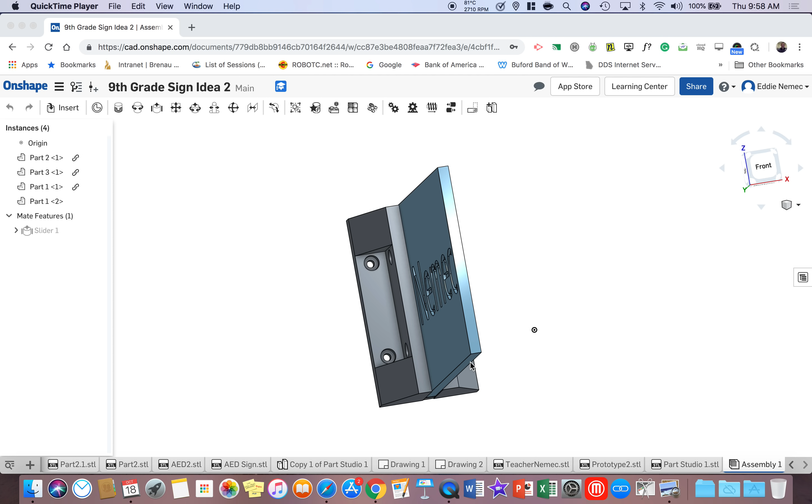Now after you've done your sign, you can see mine says Nemec, you're going to learn how to make this base plate right here on my screen. You'll notice at the bottom I have tons of different drawings. You're going to learn that you can make multiple drawings within one product or one OnShape studio.

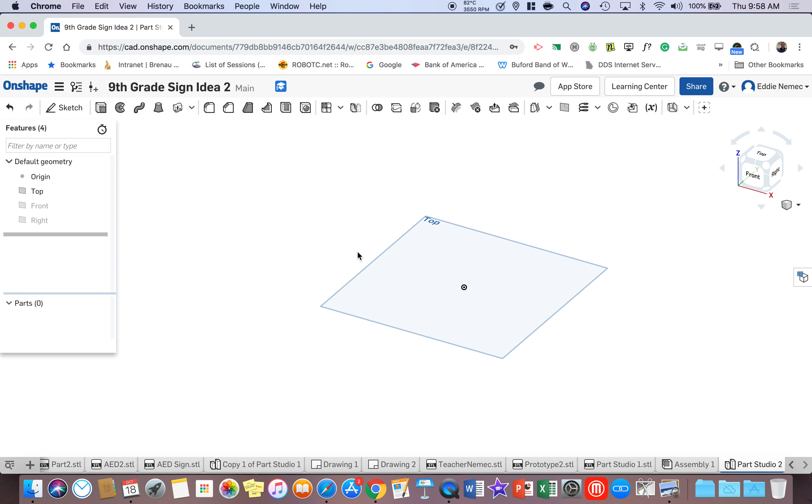So after you finish the sign with your name on it and you have the two holes in the right spot, come down to the bottom left where you see the plus sign, and say insert new element and left click. Then come up to where it says create part studio and left click.

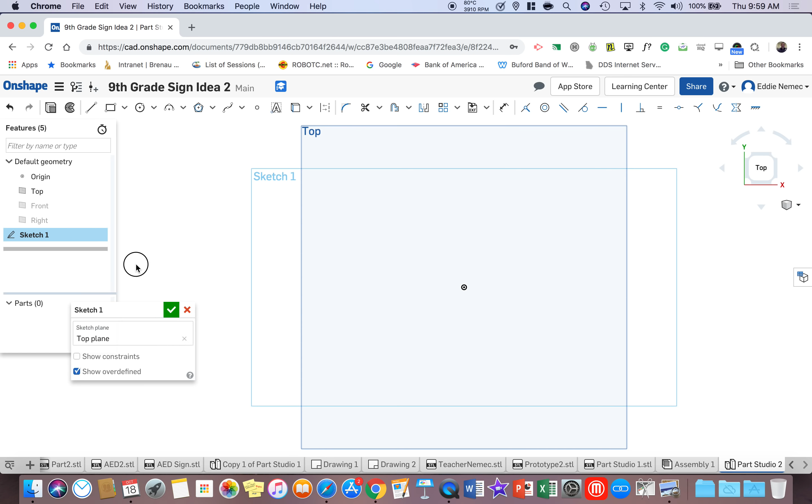Now what you're going to see is a fresh start. Make sure your measurements are still in the 3 bars workspace units in millimeters. Good, they are. I'm going to left click on the check. Now I'll come over to the front, left click on the eye on the front, and hide the right plane. Now all you see is the top plane. I'm going to go to the top of the cube and left click.

Now I'm going to go to sketch, left click on it, and left click on the plane. If this menu is ever in your way, bring your mouse over to the menu and hold down the left button when you see the hand, and you can slide this anywhere out of the way if you need to.

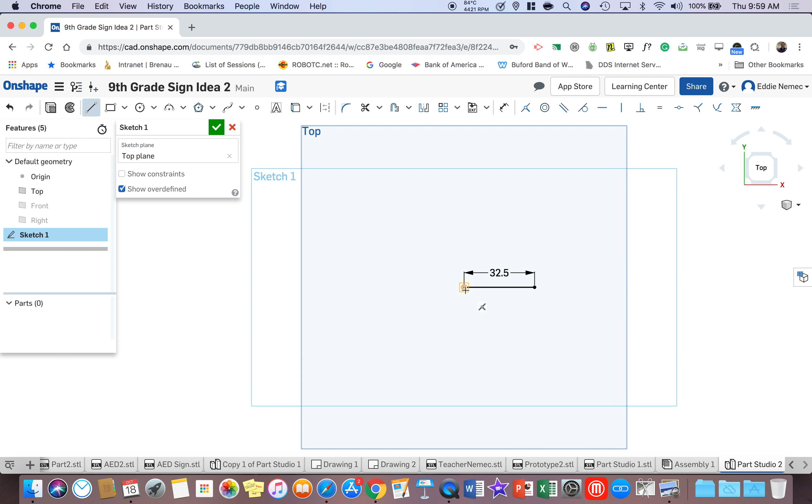Alright, my first step is to go to the line tool and left click on it. I'm going to come right here on the origin and wait till I see the symbol, then left click and start drawing my line out to the right. Don't go up and don't go down, it needs to be straight, just left click. You're going to type in 32.5 and hit enter.

Now I'm going to teach you a really cool trick. I'll right click, escape this line, come back to the line tool, and this time left click on the dot, go straight down, and then left click. I'm not going to measure it, I'm just going to right click, escape line.

Now if you go to this tool, which is called the mirror tool, left click on it. Left click on this line, it'll turn yellow, and then if I click on this line, it's going to reflect it exactly across that line. This is very handy when you want to draw and skip a whole bunch of steps.

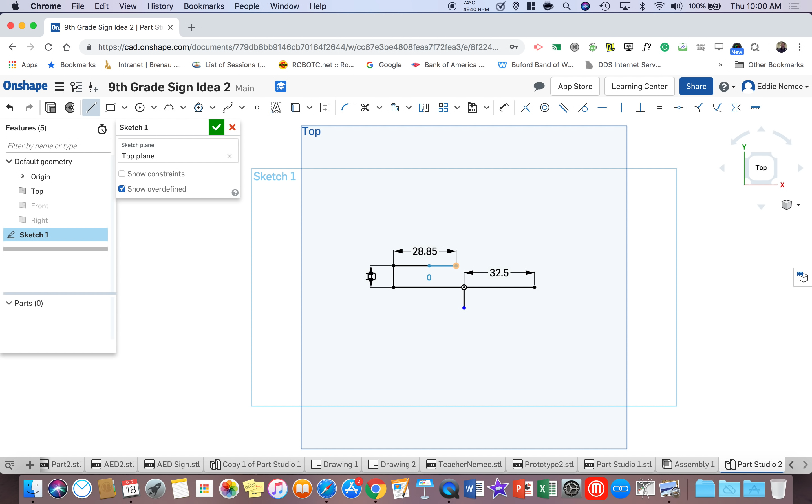So I'm going to go back and uncheck the mirror tool, and leave this line because we're going to use it again. I'll come back to my line, left click on this endpoint and go straight up and click, then type in 10 and hit enter.

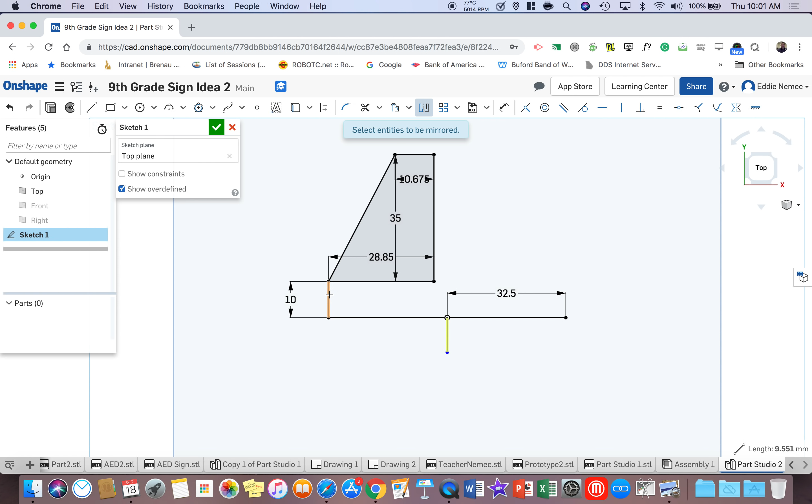I'm then going to come over to the right and left click, and type in 28.85 and hit enter. I'm then going to go straight up, make sure it's a right angle, and left click, and type in 35 and hit enter.

And then I'm going to go across to the left and left click and type in 10.675 and hit enter. Then I'm just going to bring my mouse down to this dot and left click and connect it. Now I'll right click, escape line.

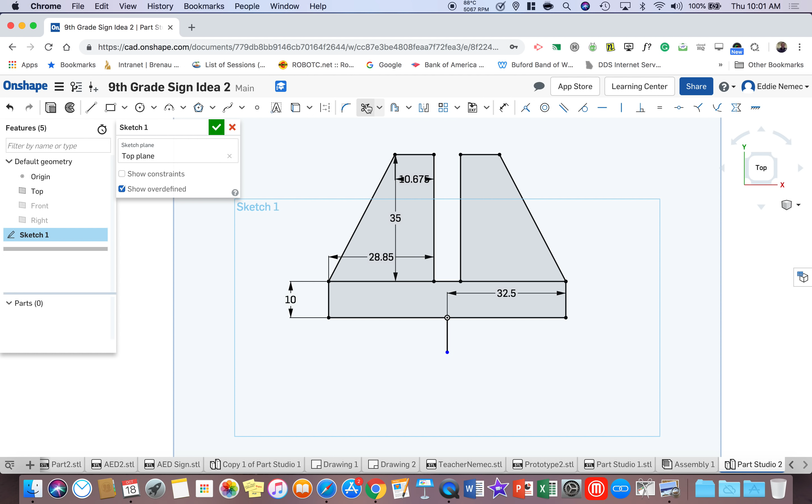I'm going to go back to that mirror tool, left click on it, left click on this bottom line, and then start clicking on all the lines that I just drew. You'll see as I click on them, they'll appear for me. I'm then going to go to the left line, left click on the line up here, and connect these two dots to make a complete shape. Right click, escape line.

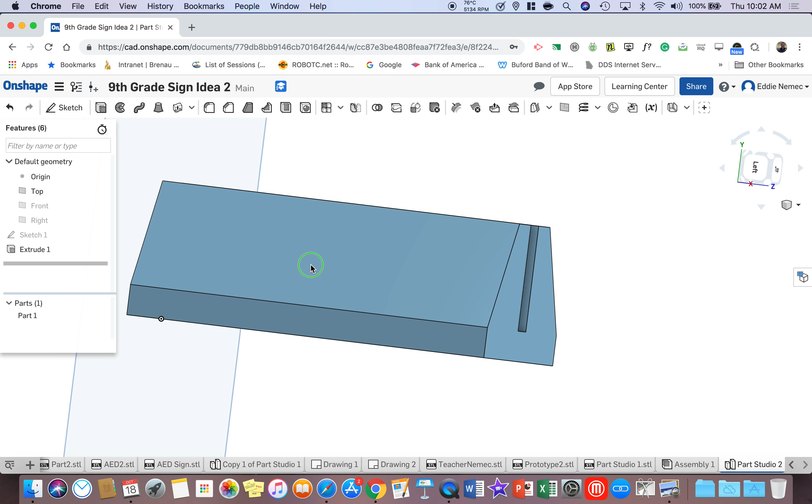Now I'm going to take the scissor tool and start cleaning up these lines. I'll come to this line and left click, then come to this line and left click. And now I'm going to come down to this bottom line, which was a mirror line, and left click and get rid of it. Right click, escape trim.

Now what we're going to do is go up to where it says extrude and left click. Then all we're going to do is type in the number 125 and hit enter and hit check. Now you can see that we have built out the majority of the base plate holder.

Now what you need to learn how to do is cut in the slot over here and cut in the slot right here. I will show you that in the next video.